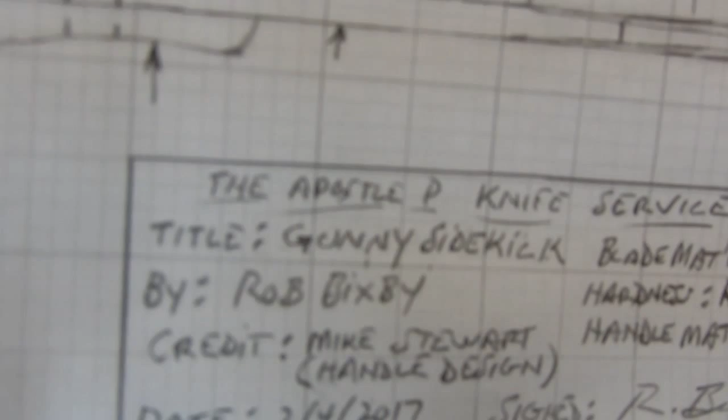And those of you who follow me on Instagram have seen this drawing. This is a knife designed by yours truly of the Apostle P Knife Service. The working title of this knife has always been the Everyday Bowie, because I'm not stupid enough to ignore Mike Stewart. The new working title of this knife is the Gunny Sidekick.

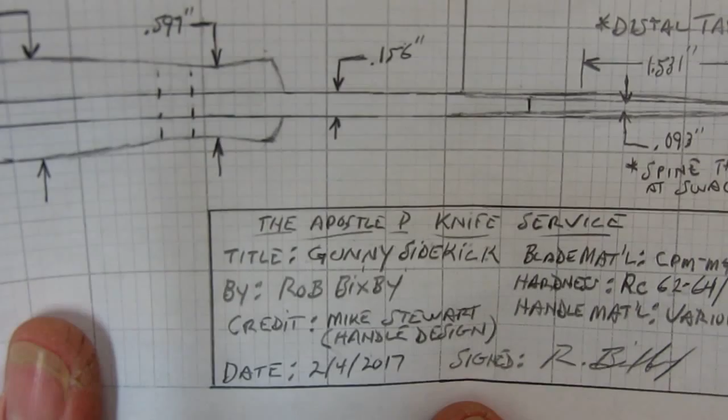Because we're using this handle and we're making a knife that's almost the same size, just 1/8 of an inch longer in blade length, Mike told me that I would be leaving money on the table if I did not keep the name Gunny in the name of the knife. And I'm grateful to Mike for being so persistent about that, let alone just offering it in the first place. Gunny's his name, and of course I do credit him on the handle design.

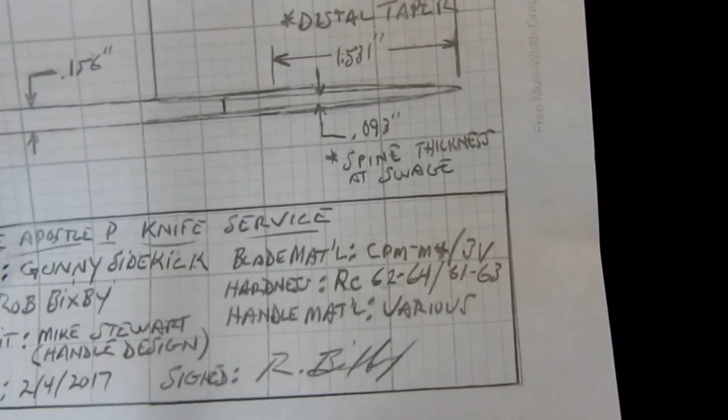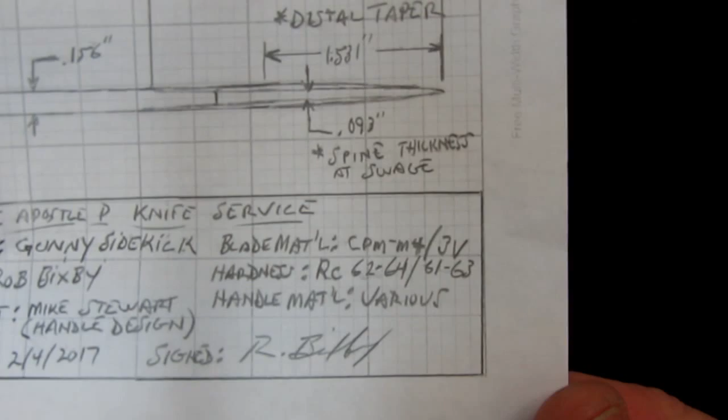Blade material on this knife, I'm still torn, and that's one of the reasons I'm making this video. My initial thought, my gut reaction to what steel, was CPM M4. You guys know that I love CPM M4. That is the Crucible powdered metal technology version of M4 high-speed tool steel. The Gayle Bradley series of knives are in M4. Several Benchmades are in M4. The big 810 Contego, the Bark River Essential, a couple other Bark River models.

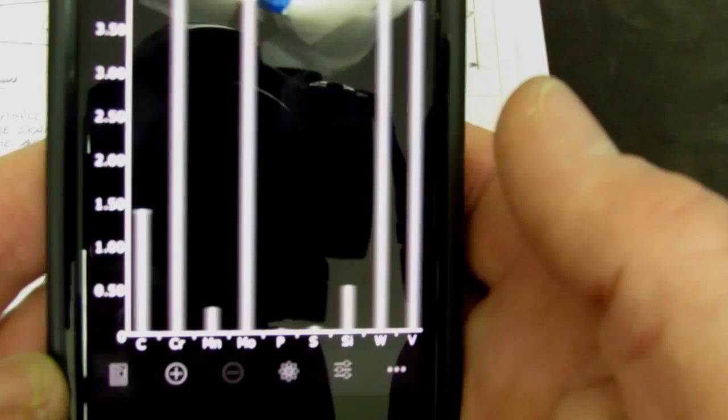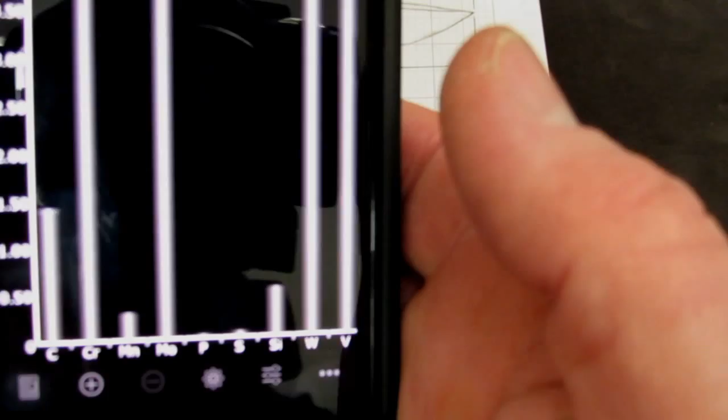It is not an easy steel to work with. It's not easy to grind. It's not easy to sharpen. And it's not extremely corrosion resistant. Let me get my little steel app out here. Okay, so CPM M4, as you guys can see, is a very high carbon tool steel. Almost 1.5% carbon. Only about 4% chromium. A ton of molybdenum, about 5.25%. A little bit of phosphorus, a little bit of sulfur, a little bit of silicon, a ton of tungsten, and a significant amount of vanadium.

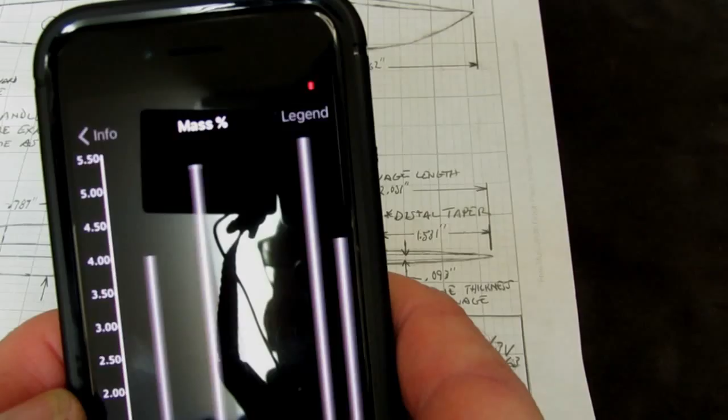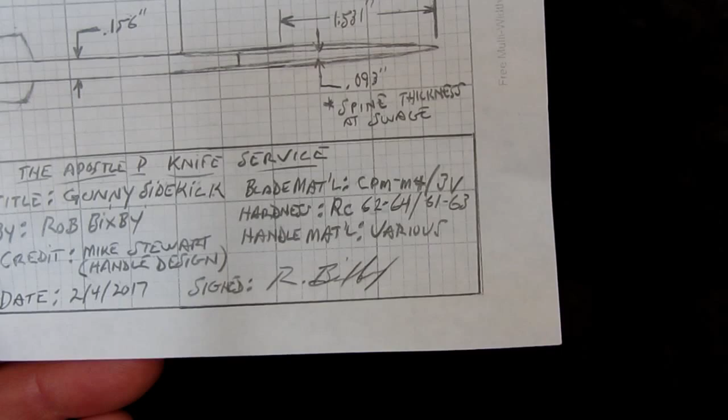So what you get with CPM M4 is a steel that will achieve an extremely high hardness with a fine enough grain structure to take a super keen edge and a super high polish. It's extremely heat resistant. A high speed tool steel means you can use it as a cutting tool, as hardened and tempered, and you can get it screaming hot, almost glowing red, before it loses hardness in a secondary temper. Does that mean anything in a knife?

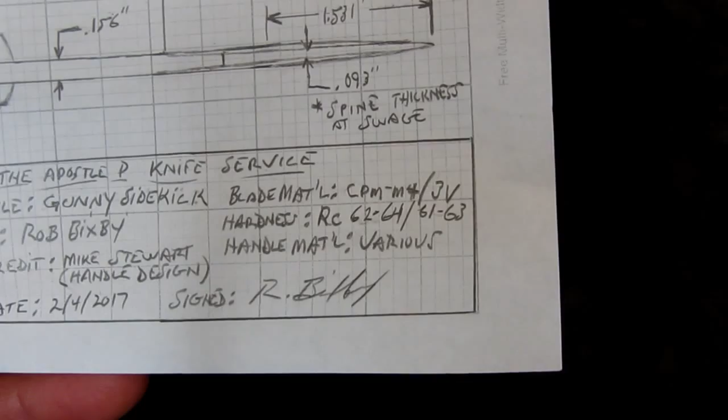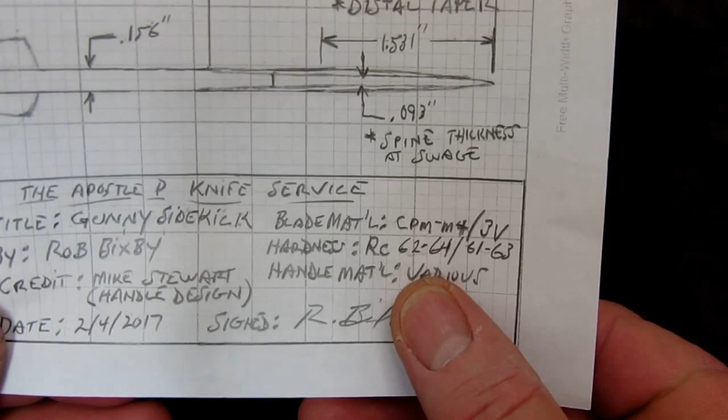Heck no. In a cutting tool, like a rotary cutting tool, you're going to run the stuff up around 65 or 66 Rockwell. And even after you get it smoking hot, it might only come back to 62 or 63 and still be effective. In a knife application, the beauty of M4 is that you can run it down in this 62 to 64 range, and it picks up an amazing amount of toughness that it doesn't necessarily have up around 65 or 66. So super edge holding, super fine edge, and more than adequately tough, not brittle at this robust hardness.

The one knock on CPM M4 is that it will pit and spot, not necessarily orange rust, but it will pit and spot. You've got to take care of it. The other steel that I've been considering is 3V, CPM 3V.

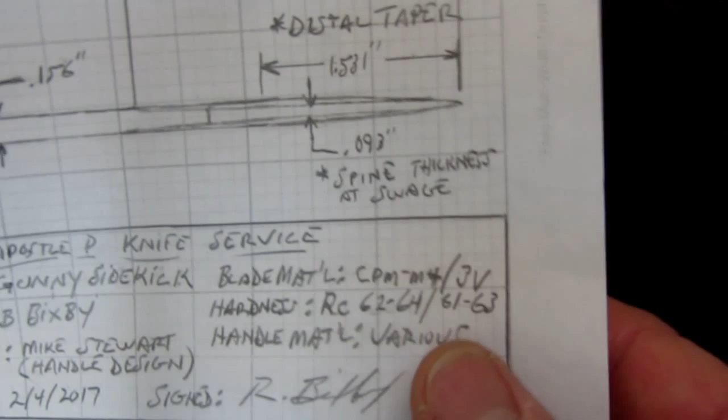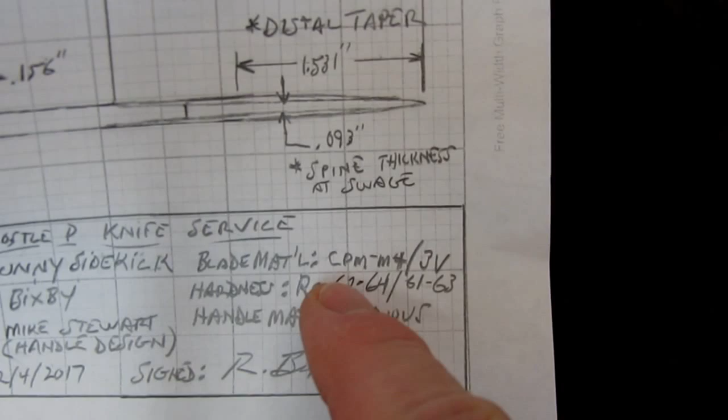An anomaly of a tool steel. CPM technology again, only about 0.8% of carbon. Still able to run up around 61, 63 with amazing toughness and a great wear resistance for the toughness. Of these two steels, CPM M4 will be a little more wear resistant, still good toughness. 3V, still really good wear resistant and amazing toughness with better corrosion protection than M4.

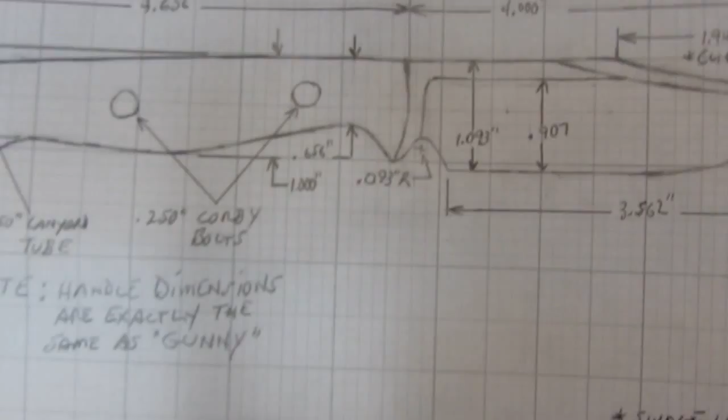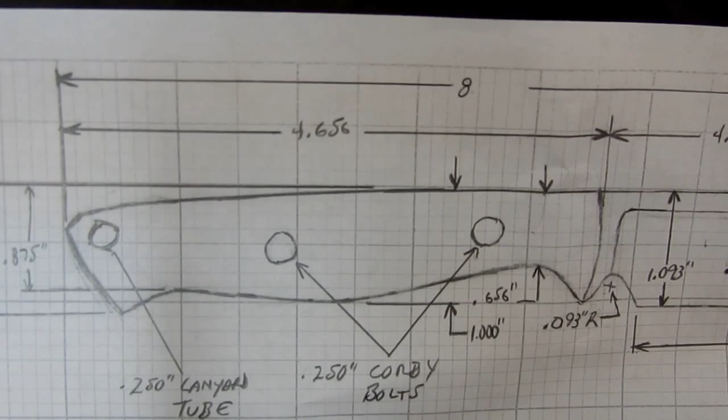So let's keep going, shall we? Let's take a look at the particulars of the knife. The gunny handle is nothing new. It is so awesome, it doesn't need to be new. So the handle length, 4.656 inches, so that is 5/8 plus a 32nd, 4 and 21/32 inches long.

How are you Europeans doing? You okay? You still with me? No millimeters.

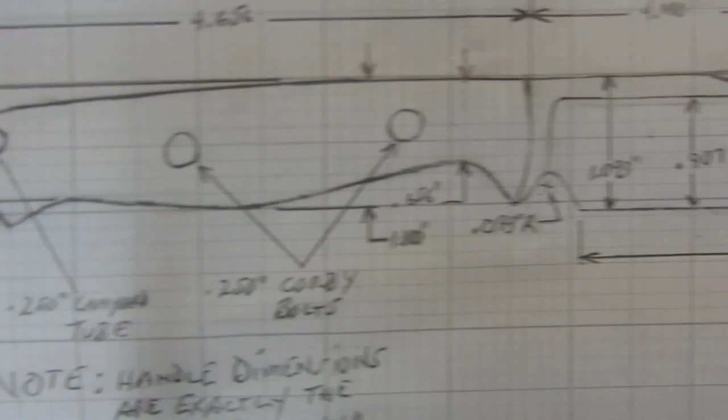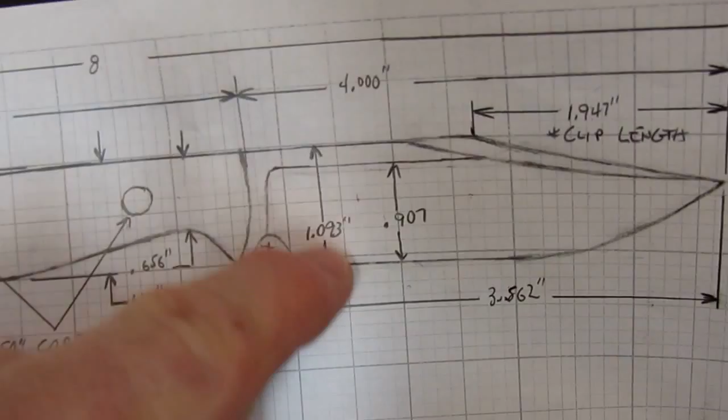These dimensions are kind of unimportant. They're tangential. Then we've got a blade that's exactly 4 inches long with a 3 9/16 inch cutting edge. The height of the blade is 1 inch and 3/32, 1.093. The gunny blade is 29/32. So the sidekick will be a full 3/16 of an inch taller in blade height than the gunny.

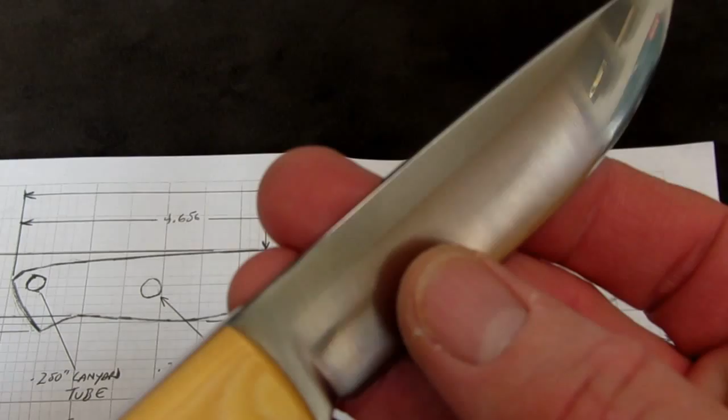Same thickness, 156 is the stock thickness, but it's 3/16 of an inch taller, and then the grind will be another 1/16 higher. The convex grind on the gunny hunter starts a 1/4 inch from the spine. This will be 3/16 from the spine, so the grind height will be 29/32, basically as tall as the entire blade on the gunny hunter.

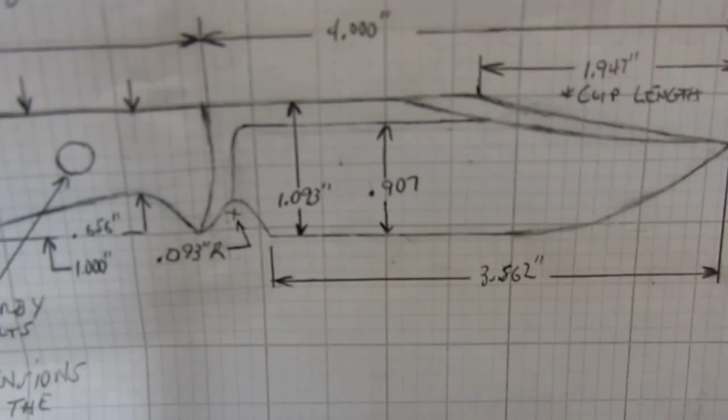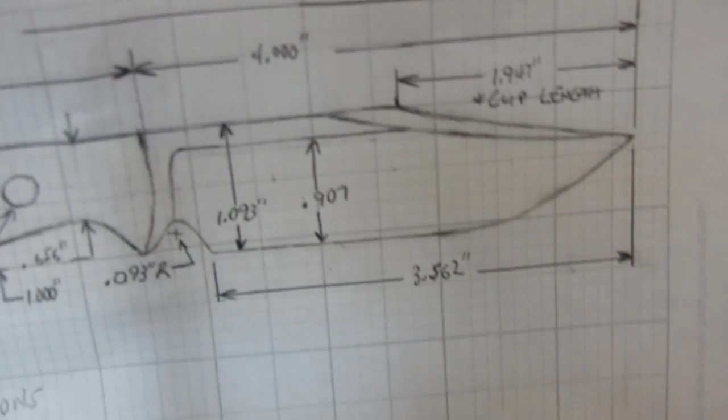So even at that 5/32 stock thickness, we've got a very tall convex grind that's going to be, you guessed it, an amazing slicer. Still with a robust enough spine thickness that this will be a knife that you can baton with. Too short for a chopper, of course. And if you come down here to this view, notice even with the swedge, we're going to retain some spine thickness all the way out to the tip, so you won't destroy your baton if you would baton kindling with this or something.

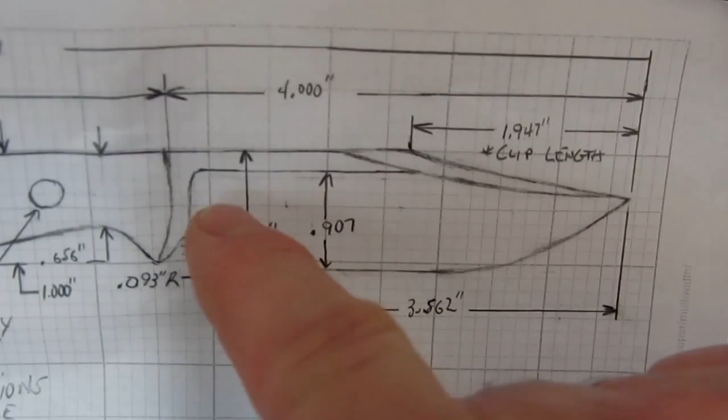How about the proportions of that blade? Guys, you have no idea how many times I drew and redrew this blade. Notice the clip, almost half the length of the blade. So the blade's totally 4 inches long. The clip is 1.947. Pretty much half of the plunge ground area. Good sweep. So it makes that rather tall blade for 4 inches total length not seem stubby. And then a nice swedge that will take up more room vertically than it will horizontally. Just beautiful proportions.

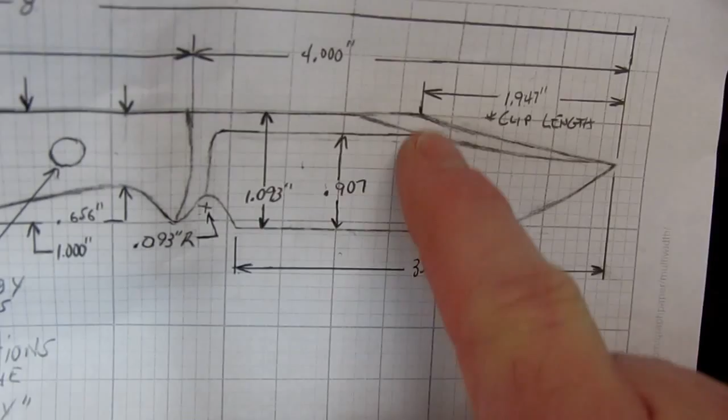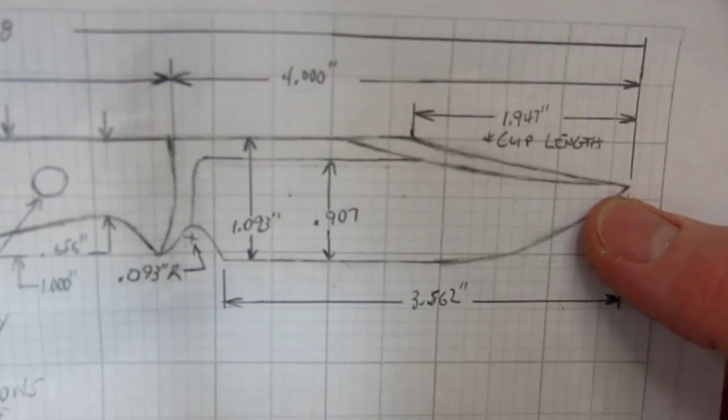Straight out to this point. So the straight portion of the cutting edge is almost exactly as long as the clip, or the unclipped portion of the blade. So full height, 2 inches out. And then we have this beautiful sweeping belly. Come to a point that is just slightly above the axis of the knife. So it's still going to be pretty much straight ahead, but I raised it just slightly from center line to take as much advantage of the belly as I could.

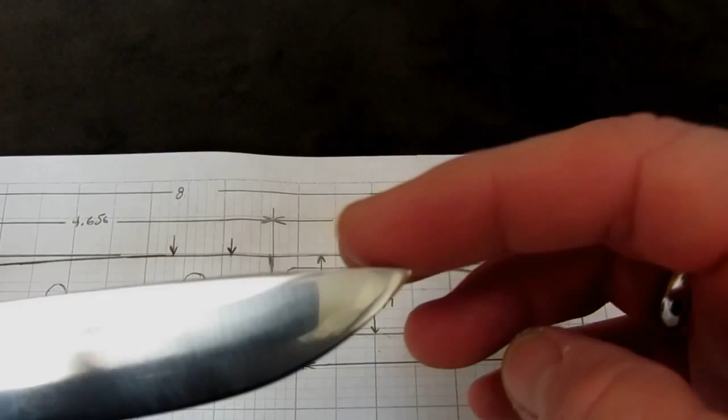If there's one area that the clip point blade isn't the best, it would be in the drilling function of bushcraft. You kind of need the spine as you're drilling to force the cutting edge into the work. When you have the clip point, there's really not much of that going on. So we sacrifice that with the clip point blade. We know that. But the rest of it is so good we don't care. Still plenty of skinability. Another reason that the point is slightly above center line. Definitely could hunt this knife. No problem at all.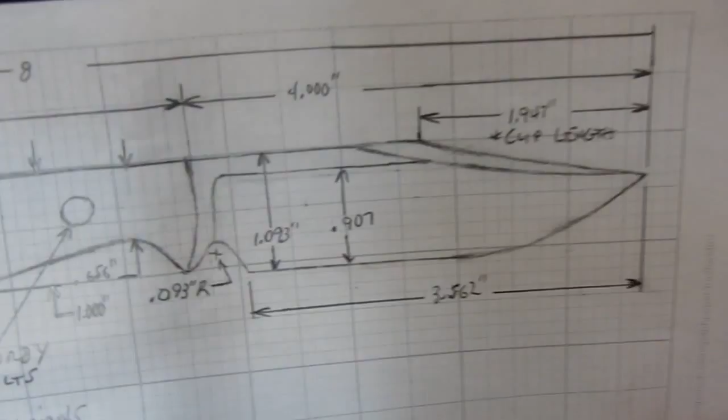Now let's look at my favorite part of the design. Well, not really. The overall blade shape's my favorite part. This area right here.

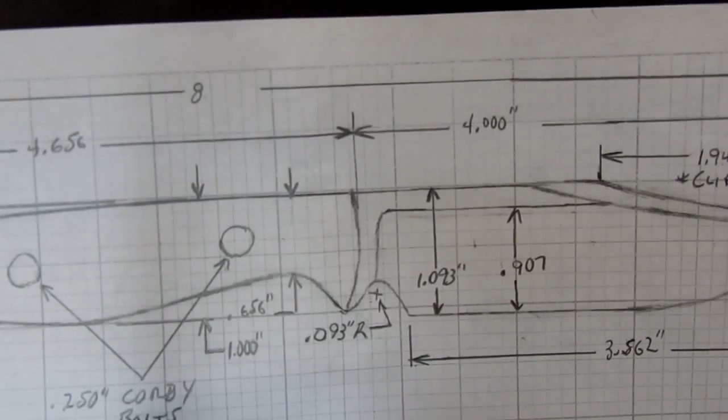What is it? Well, it's a sharpening choil. And this knife is scaled 1:1. And you can see clearly, I think, that sharpening choil is much more generous than the one in the Gunny Hunter. 3/32 radius, and then spreading significantly.

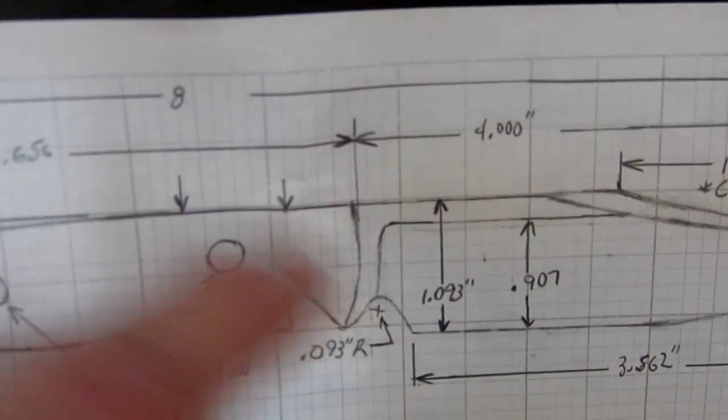So this plunge is going to finish about here. So we're going to have plenty of room, more than 1/8 of an inch of fully plunged primary bevel. So we'll be able to hang our sandpaper, whatever sharpening media we're using, back over the heel of the knife, so we'll end up with no recurve back there. Okay, that is the Sharpener's Choice Sharpening Choil right there, my friends.

Just take a look. Ain't she pretty? Oh, and it's going to be so good in the hand. So good in the hand. Oh.

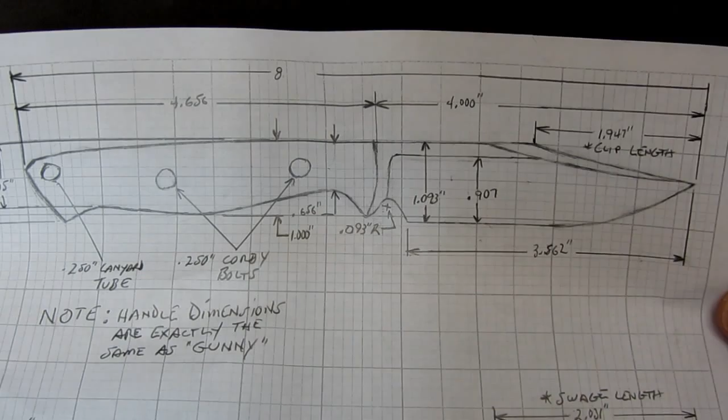So, the schedule for this thing. That's kind of hard to tell. By the way, as you're giving me input on steel, consider this. Bark River has lots of 5/32 3V in stock. They have no M4 in stock. Just keep that in mind. I would love to see these knives in the retailer's hands before hunting season next fall.

We're going to prototype this thing in a week and a half, I guess. The grind-in at Bark River is the 17th, 18th, and 19th of March, Friday, Saturday, and Sunday. And we're going to prototype this knife in 3V at the grind-in. And I'm going to try to take as much footage as I can. I think Mike's going to have me a blank, water-jetted, hardened, and ready to go bevel ground. And then we're going to hand it off to our buddy Skittles. And we'll make one up. And that's going to be the only one for a while.

And depending on the material we decide to use and their production schedule, sometime this year we hope, we should have knives. I believe we're going to make 150 of them. They are going to be a Knives Ship Free exclusive. So Derek Bone, a good friend of mine, proprietor of Knives Ship Free, has agreed to burn one of his 2017 exclusives for Bark River on my design. So big shout out and a big thanks to you, Derek. I really, really appreciate it.

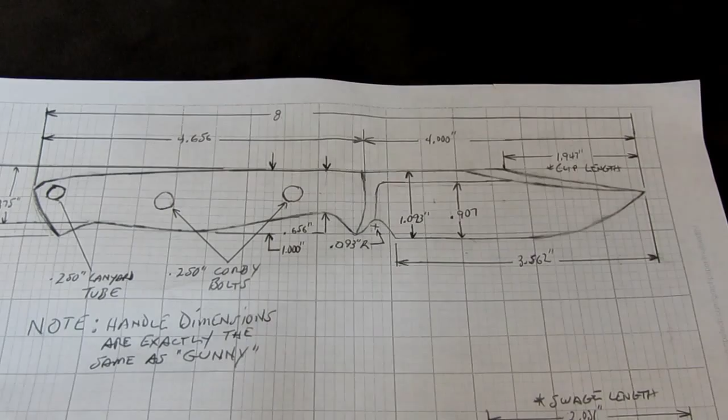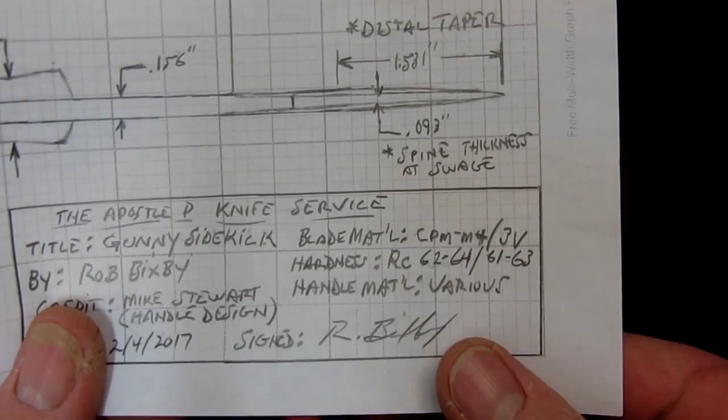Not fun stuff. There is a reason that my initial gut said go M4, because you guys know I love it. It is the most rewarding steel that I sharpen. It is so difficult. It takes so much concentration, so much work. But man, when you do your job, it does its job. Oh my Lord. Does it take an edge and does it hang on to it? Love that stuff. So that's that.

Stay tuned. I hope here in 2 or 3 weeks you're going to see another video with a real prototype Bark River Gunny Sidekick Bowie knife. Yeah, that's the plan anyway. So stay tuned, and we'll see if we can't come up with something beautiful for you guys.